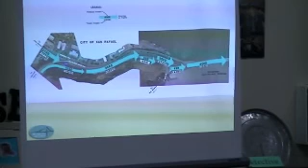This is a useful diagram. These little white numbers are the traffic that exists now. There's quite a bit of traffic on 580, and an equally large amount coming off of Drake, and it's approaching the bridge, and it's too much for the bridge to handle.

That's the situation. One interesting factoid from this slide is you have a lot of people jumping off of 580 at San Quentin and jumping back on. It's the famous queue jumping, which people do.

This 900 cars getting on right here, combined with all this traffic on 580 and on Drake, is what is overloading that approach to the bridge. And there will be a barrier along this little Main Street frontage road area.

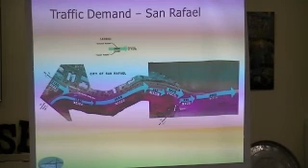There's been a lot of concern expressed by San Quentin Village and people in that area that because of all this traffic they can't get to their homes, because this is a single access point for those folks off of Drake and off of this location. So with 3 lanes now on the bridge, it will allow a lot of additional traffic bottled up trying to merge to actually have free access onto the bridge.

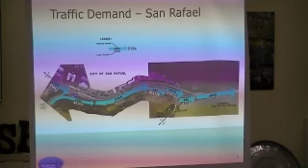This is a picture of that Main Street on-ramp. It's rather constrained. It's going to be rebuilt so that there'll be a 3rd lane up here in that wide shoulder area. You can see that right there. And traffic will still be able to get on and merge onto the bridge from San Quentin, from this Main Street area.

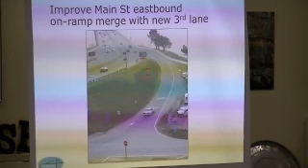There's been some claims that we should be able to go out and restripe this and open up this lane. It used to be there. All true. It involves a little more work, especially with these new sign support structures that are going to have the green arrows and the red X's, and all that we have to do on the approach to make these ramps still viable, and what we have to do on the other end. So the project's a little more complicated than just striping in the lane that used to be there.

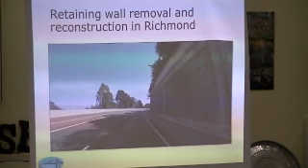So the wall has to be moved back. The good news is that it can be done. It's going to cost some additional money, that's built into the estimates. It can be done at the same time the other structural work is done to rebuild ramps, etc. So it doesn't necessarily hold up the project, but it is a necessary feature to the project.

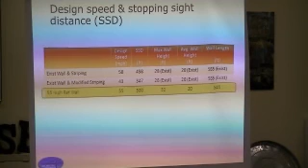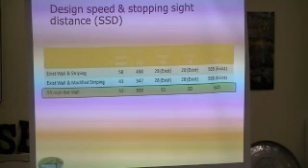Now, another reason for the wall, and this is just some detail on it, is this fact right here: without moving the wall, the safe speed is 43 miles an hour. And we want a safe speed of 55 or 60 miles an hour, because I don't know if all of you are going to slow down to 40 miles an hour, probably not. So that's why freeways are designed, and we're trying to design this one accordingly to accommodate the natural, higher flow of traffic and the higher speeds that traffic is going to travel. So that's some information on the length of the wall.

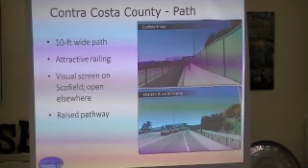And that's what that path will look like. So you'll be protected from the traffic lanes, and that's a bi-directional 10-foot path that will take you right off at that off-ramp, and then you'll wind around and come across state property and get back up here on the bridge.

The bike pedestrian path on the upper deck is going to be 10 feet wide. That's a standard width for bikes and pedestrians. It's going to be protected from the adjacent traffic by a movable barrier. The idea is not to have to move the barrier very often, but if it has to be moved for maintenance purposes, it could be.

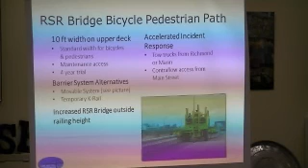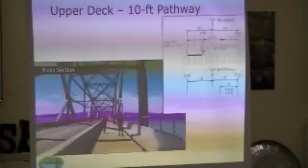There'll need to be some increase in rail height on the outer rail of the bridge, but it is a bi-directional 10-foot pathway. A huge commitment made by the department, bravo, to allow that to happen on the upper deck with a movable barrier in place in case there is some need to share the shoulder. One concept that's been talked about a lot is how do we share the shoulder? A movable barrier allows you to do that more easily.

Incident management - closed-circuit TV cameras, tie-in with the MTC Caltrans Traffic Management Center, good incident response, etc. Because when you take that shoulder and use it for bikes, you have to make sure you can accommodate vehicles that break down. That is part of the piloting aspect - let's try this, let's make sure we can manage incidents when they occur, and then we'll see where we want to go in the long term.

So this is also going to be looked at as a pilot project. The budget - there's been a lot of talk about this. The overall complex of projects at this point in time is $74 million, which has been committed to by the Bay Area Toll Authority in an action last July. Thank you, Bay Area Toll Authority. It's hard to come up with $74 million. Believe me, I know that for a fact.

The third lane eastbound is a little higher in cost than what was originally estimated because of that retaining wall, the incident management, and some of the features on the structure with the red-green peak period usage only. So that's gone up a little bit between last July and now.

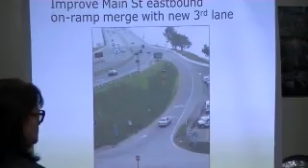Let me just take a few seconds talking about the same issue. I think we're all trying to find ways of taking appropriate risk to get the project done. But we're also mindful that if the project is successful in moving the 20-mile-an-hour traffic you just cited, then that traffic will not be moving at 20 miles an hour.

It will be moving at a much faster speed, getting him to the other side and having him come to a potential stop behind a vehicle disabled on that lane without enough sight distance. I think that's something we're looking after and want to make sure we're addressing. That doesn't mean we're not going to be looking at appropriate risk in the various elements of the project.

And that's how we got to where we are today. This is a project that was not approved in 2007. We tried very hard and we could not get there. We have opened this up, and I think we're trying to find a way to actually complete this project and get it done. And with that comes a lot of risk assessment and risk management, and appropriate risk for the traffic in order to be able to do what was outlined today.

And I think we've made tremendous advances in that area. I know those who sit in this traffic every day would like to not sit in that traffic tomorrow, not next week, but tomorrow. But the reality is it's going to take a bit longer than that before we can actually get there. I think we're open to looking at various ways of accelerating this. I think there is enough support at the state, county, local, and regional level for us to do that. And the department is standing here to make sure all of those are considered as we go about making decisions to put both the bike and the cars on both decks of this bridge.

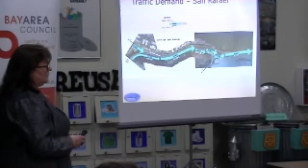Well, all good questions, let me answer what I can. I guess what I'm getting at is, is this more than just handling the bridge and this one little area? Is there something farther up north that needs to get handled so there isn't so much mass coming to the bridge at that time? I know they don't want to go on 37 because that's really not fun.

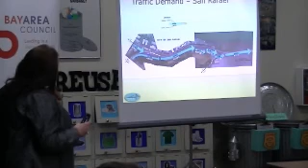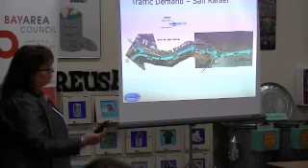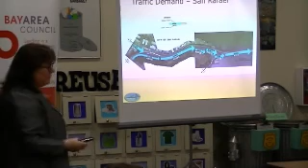No, about 10% of the traffic coming to this point and approaching the bridge is coming from the Golden Gate Bridge. So that's not a huge amount, but it's something. The majority of the traffic crossing here, interestingly, is coming southbound on 101 - so it's coming from San Rafael northward. There is a considerable amount, though, coming northbound on 101 that originates in Marin. So really, it's a very small percentage coming across the Golden Gate.

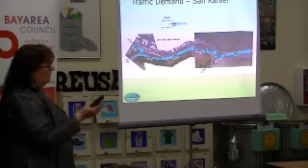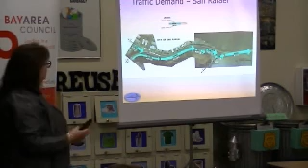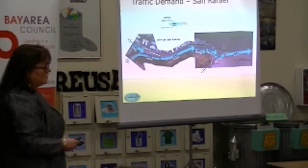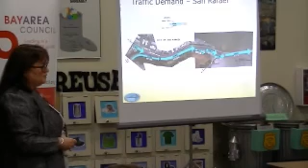But if you work in downtown San Francisco and see what they're doing, trying to build the Transbay Terminal and extend the 3rd Street Muni, et cetera, maybe some people are choosing to bypass and come through - hard to believe, but maybe true. What we do know is we've got a lot of varied pairs of origins and destinations now. You've all noticed northbound 101 traffic traveling to Santa Rosa in the morning is much heavier than it used to be, and that's kind of a reverse commute component we didn't see 10 years ago. We've got very heavy traffic in the afternoon coming both directions.

We believe that relieving this bottleneck is going to help. It helps all those groups.

Coming across the bridge, here's another interesting question: what about the lane on the upper deck? Should this eventually be a vehicular lane? At this point, Contra Costa, our sister agencies, MTC and BATA say no, we're not ready to make that a car lane. Will that demand possibly increase in the future? Maybe. Part of the reason for this being a movable barrier and a pilot is to keep an eye on that, whether we should be thinking about converting the upper deck to a peak period lane.

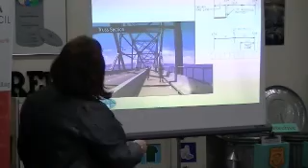When you get off on the other side, just like we've got challenges in Richmond, you're going to have challenges where that lane takes off on Drake, crosses Anderson, or you go up 580 to Bellam. So the best point is we take time to study this to make sure relieving the problem doesn't create an insurmountable problem somewhere else. Someone brought up ending this lane before you get around the curve near the bridge. But now you're stacking traffic on the bridge in stop-and-go conditions, which has its own problems with access. So we're trying to make logical decisions on operations to make sure we're not creating a significant bottleneck somewhere else. That's the goal of the project.